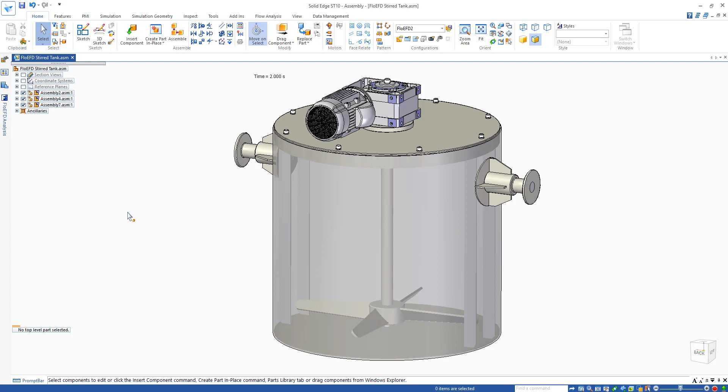So first of all, let's go over to our flow analysis tab and have a look at some of the general settings. We can see straight away this is going to be a time dependent or transient analysis, so we're going to be simulating over 2 seconds of transient. We've got gravitational effects turned on.

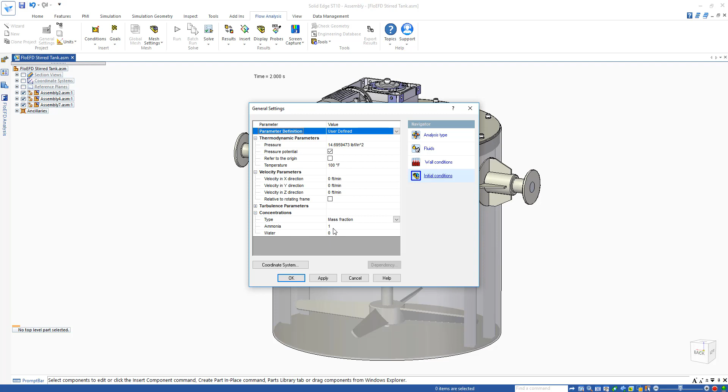We also have rotation with the sliding mesh turned on, so we're going to be using the moving mesh capability of FloEFD. If we look at the fluids, we can see that we're mixing water and ammonia together. And under the initial conditions, we can see that at time 0 it's going to be 100% ammonia in the tank as the starting fluid.

Now if we come over to our FloEFD analysis tree, we can have a look at some of the setup here. So first of all, you can see that we have a rotating region on the paddles. We're moving at 240 RPM.

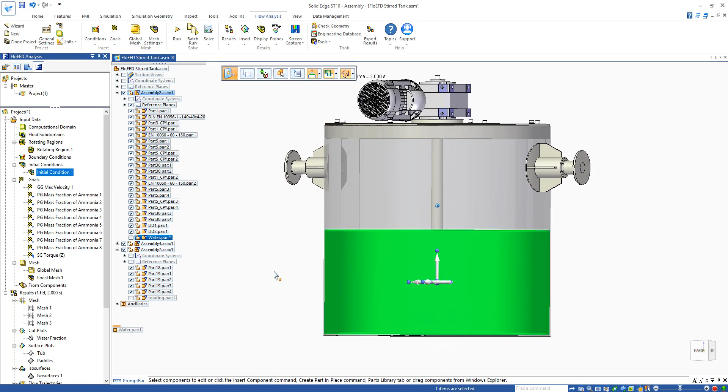The initial condition, you can see that there is a fluid level here, so the lower half of the tank is filled with water. If we look inside the properties here, we can see that we have water, 100% water at 38 degrees Fahrenheit, and we'd like to see what the mixture looks like at the end of that transient.

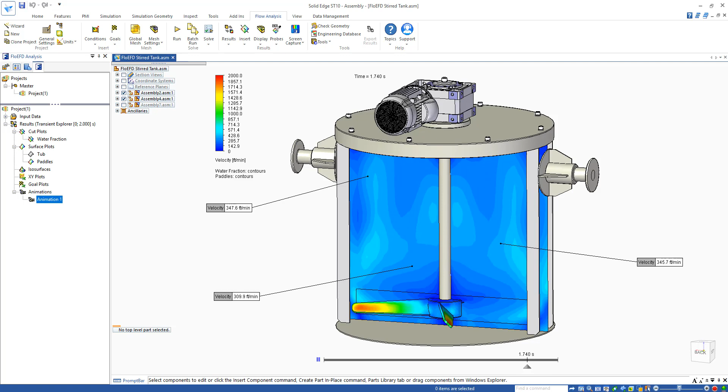This is the same plot, but this time colored by fluid velocity. We can see the high velocity region on the moving paddles. We can also see the flow develop as it moves up the inner sides of the tank and then back down the center. The maximum velocity of around 2,000 feet per minute can be seen around the paddles.

Overlaying the ISO lines on the plot shows where the flow vortices are and how they move around over the course of the transient. Two distinct vortex regions can be seen where the bulk of the mixing occurs.

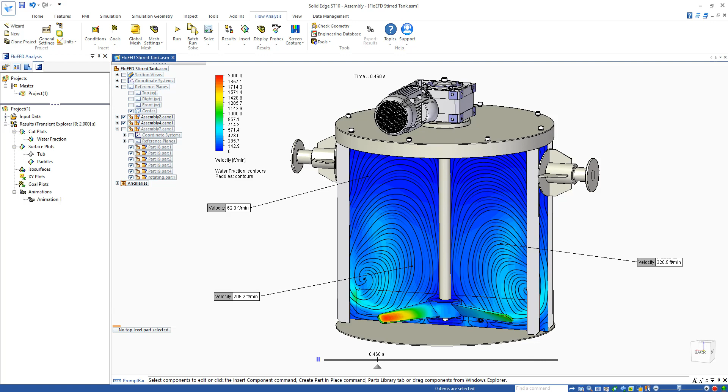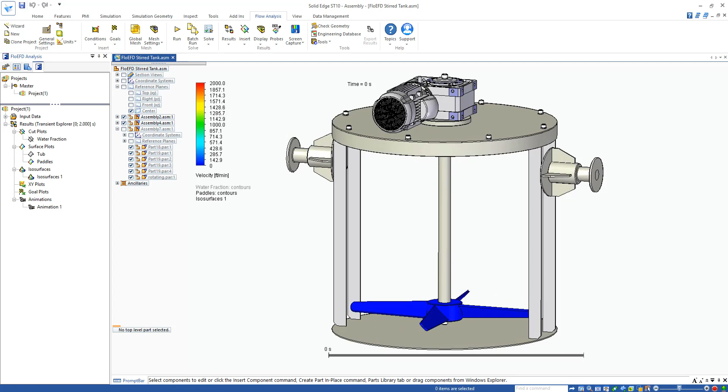Now let's have a look at an ISO surface showing where the boundary of the water lies. This moving surface gives an indication of the mixing plane in the tank. At the start, it clearly divides the two fluids, but as the transient progresses, we can see the chaotic mixing until there is no mixing plane as the two fluids have been homogeneously mixed. Creating animations like this in FloEFD is very simple using the new Transient Explorer feature.